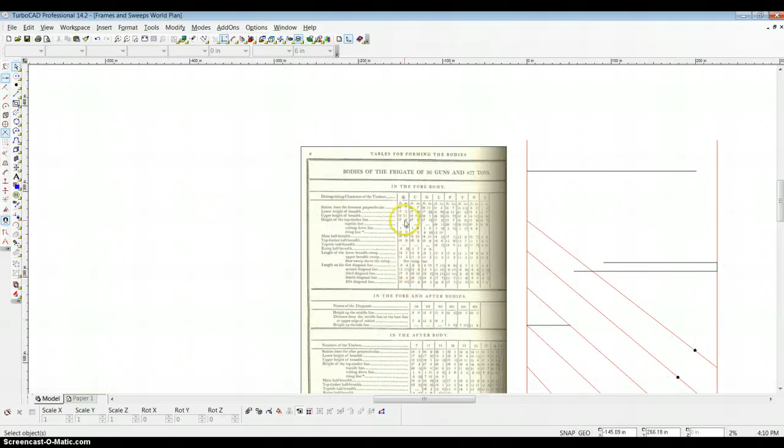The first thing I want to draw is the floor sweep, the arc at the bottom of the station line or frame. That will have its center at the end of the rising. This isn't the rising line, but it determines the point on the rising line we'll use, the end of this line here, that point there.

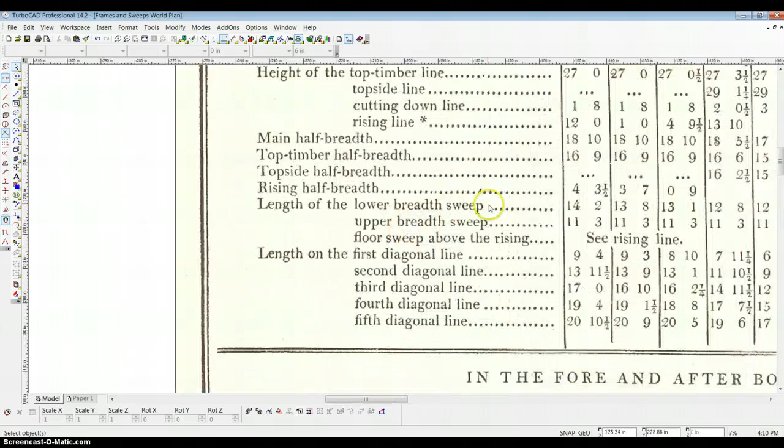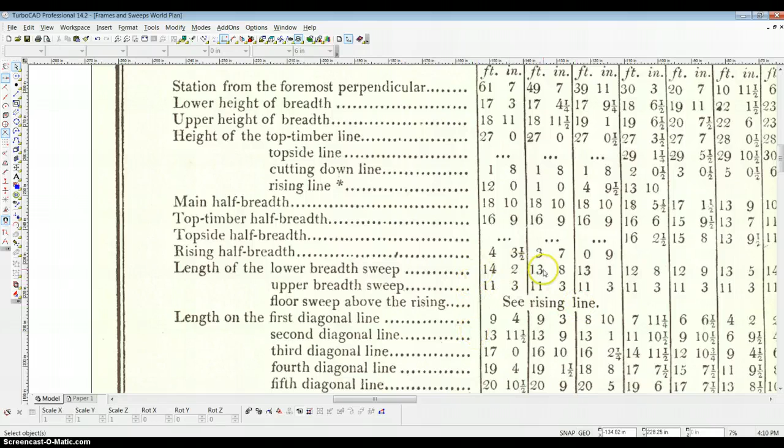Now the problem is, how long is the radius? We look it up in the chart, and it says the length of the floor sweep above the rising is, well, see the rising line. I have no idea how you do that. So I went into Steel, and reading in the text, evidently this is what you do: use the point on the diagonal closest to the head of the floor timber.

How do we find that? Well, we look up in Steel and find out the floor timber was 21 feet long, half of that is 10.5 feet. If you come out 10.5 feet from the middle line, you'd have a line right about here. So this point here is the closest point we have to the head of the floor timber.

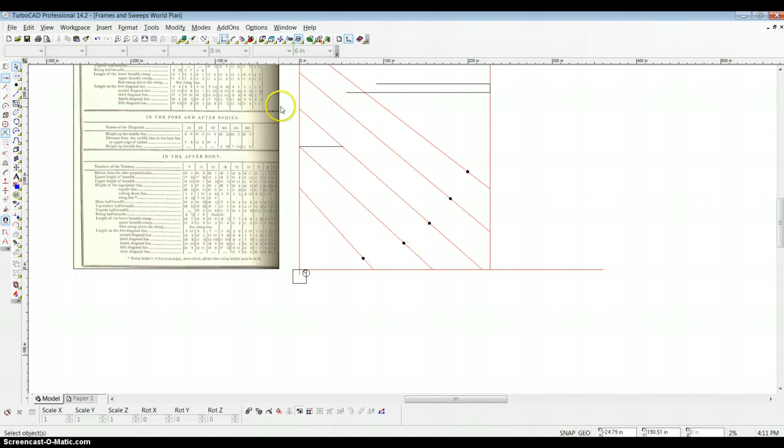Consequently, we're going to draw an arc. We'll put the center of it at the end of the line, then put the arc with a radius at that point. We'll just draw it out here and bring it up farther than we need, but we can trim it off later. So that's our floor sweep.

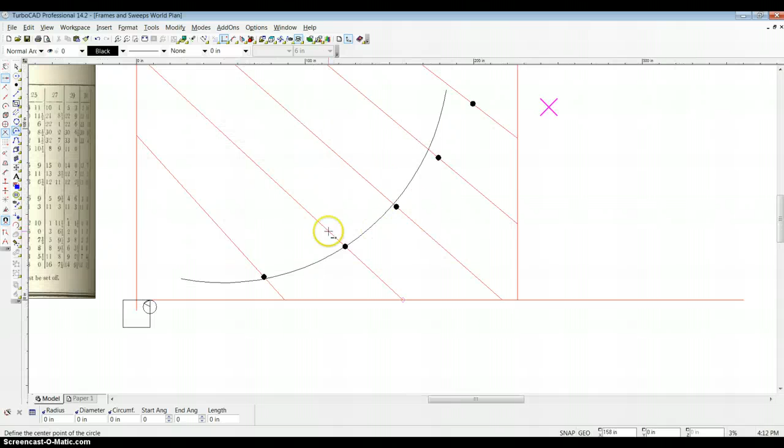Next we put in the lower breadth sweep. Much easier to do. We use this as our center, we use the other end of the line for the radius, and now we draw in that sweep. It stops at the lower breadth line, so we can stop it right there.

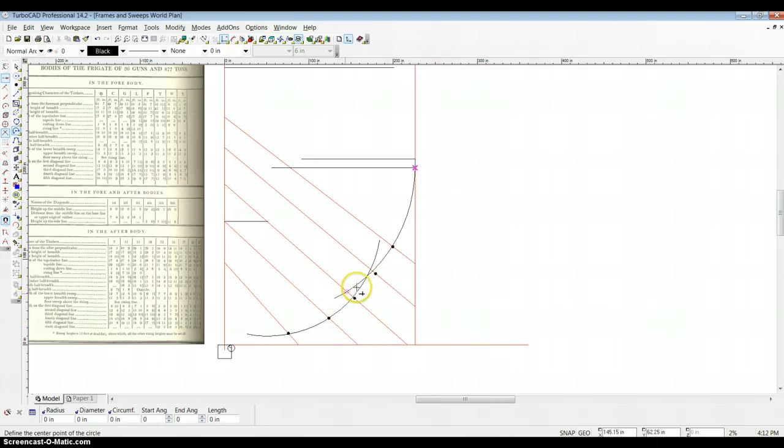Right. Now what we need is a sweep or arc that will join these two lines in a fair way that won't have a glitch on it, a bump or a break.

The literature says you draw a reconciling sweep. It reconciles these two arcs to one another. This reconciling sweep has to be tangent to these two arcs. The old literature says draw it to the back of the arc. Whenever you see that phrase, back of the arc or back of the circle, that just means tangent to the circle or tangent to the arc.

And then it has to go through these points on the diagonals. So we use a tool that allows us to draw arcs tangent to entities. I choose this as one of my entities, I choose this as the other.

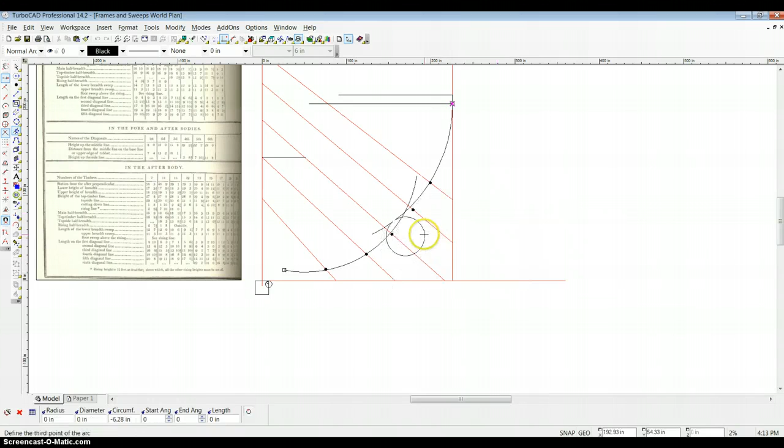Now what I'm going to do is use a point, and as I zoom in here, I'm going to use this point on the fourth diagonal, I think. Snap it there, and then the arc itself will sweep from here, and I'll bring it up well past the breadth line. So now I have three arcs.

I have the floor sweep, the lower breadth sweep, and the reconciling sweep.

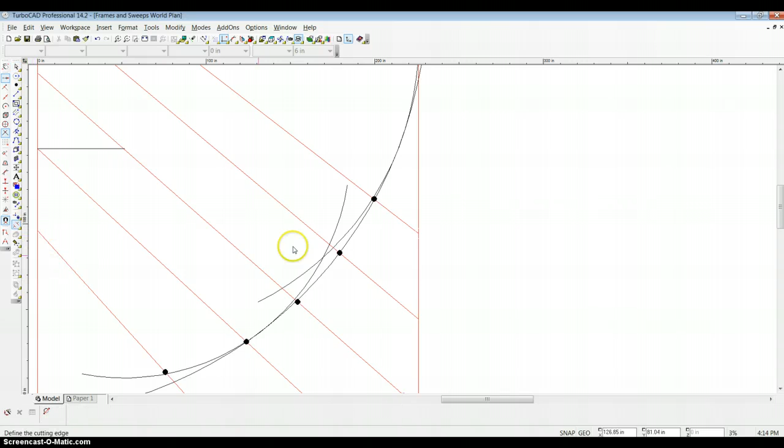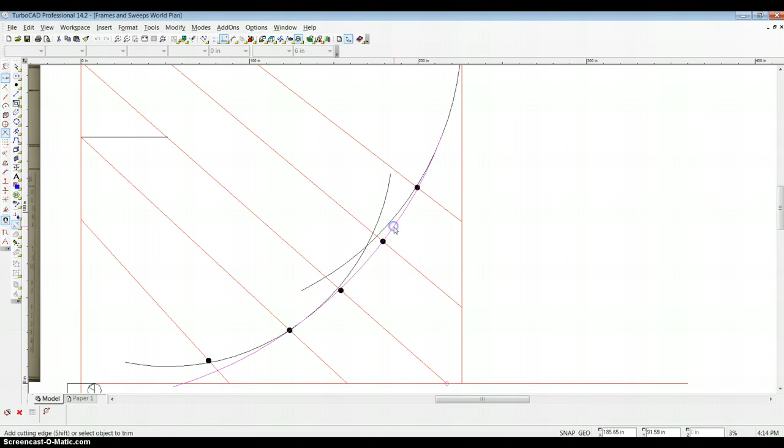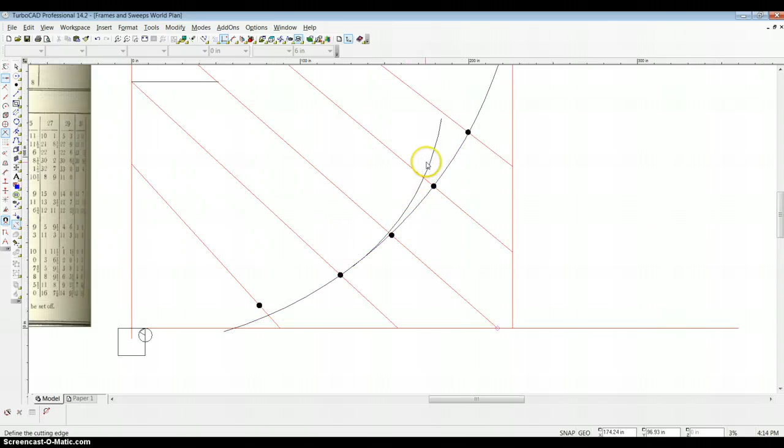Come over here and I use my trim tool to trim it all up. First I'm going to trim off this piece up here, that's why I made it longer, so it'd be easier to find. Next I'm going to trim off the lower breadth sweep. Now, well, I could have done that really, trim off the floor sweep, then trim off the reconciling sweep.

I think I did that wrong. We'll try the trimming again. I want to trim this off, oops, that back. No, that's the reconciling sweep, I'm going to get rid of that. There we go. So that's the basic underbody of the frame.

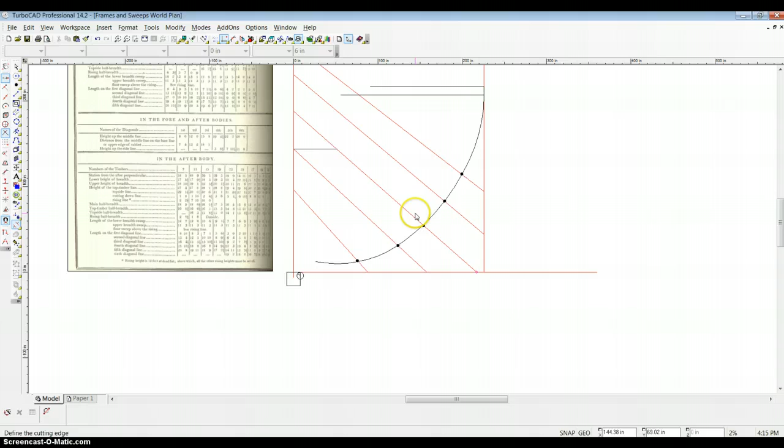Now we need to get it over here to the keel.

And again we use our arcs tangent. So we want an arc that is tangent to the floor sweep. Here's why we left this curve, it needs to be tangent to this. Tangent to there.

So we're just trying to get a curve. Obviously these are entirely different shapes depending on where I put this curve. It really shouldn't come, you just can't let the frame curl up. So I'm going to put it right about there. I believe in the loft this would have been done with a template of some kind.

There we go. And I'm going to draw from there to there. If I trim it up, okay.

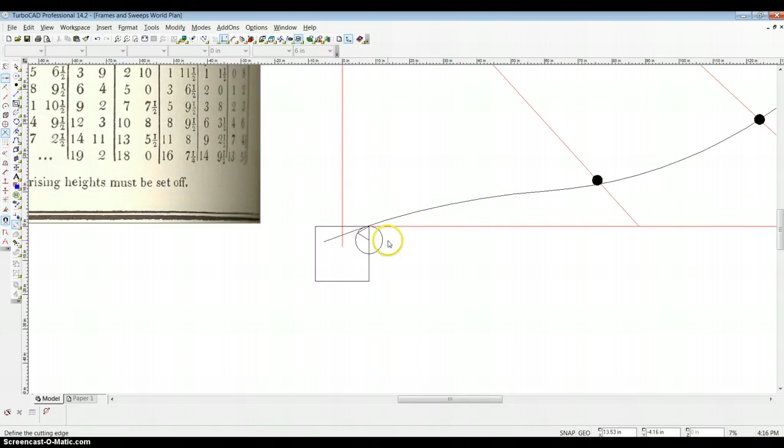Now you see that it comes into this arc. Doesn't come into the point here, doesn't come to the edge there. It comes into the arc. That's why the station lines and the frame lines keep coming inside the side of the keel as you look closely at your Maritime Museum plans.

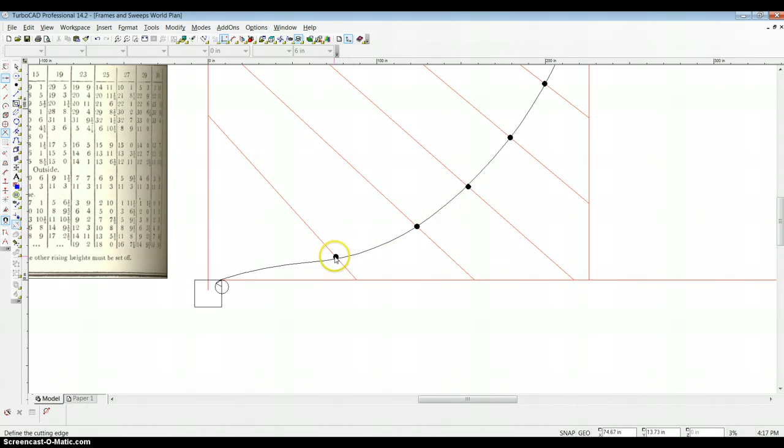That's a nice little arc, nice little station line. You notice we missed the diagonal point there, we missed it there, but three of them we actually used, or three of them we actually hit. I'd say that's pretty good for government work. We're not off by more than about an inch on those other points.

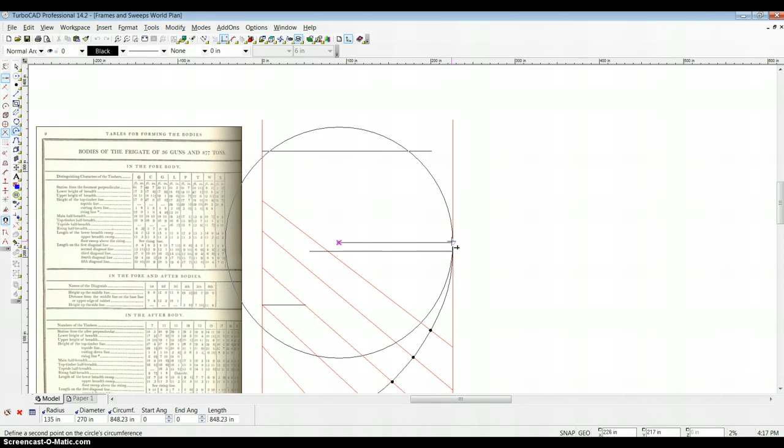We go now to the upper breadth sweep. Again we have it, we start at the upper breadth line, draw it up higher than we're going to need it. And now what we need is some kind of reconciling sweep coming down from the top timber point and fairing into the back of the upper breadth sweep that is tangent to the sweep.

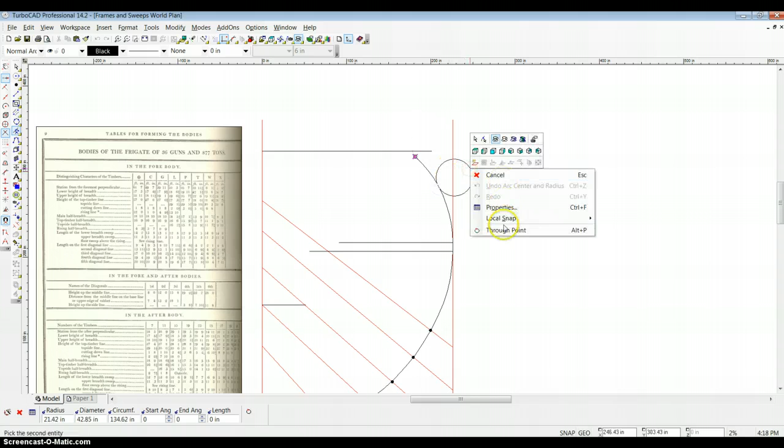So again I use my tangent arc tool. I choose this to be an arc, and tell it I want to hit there, and then I just draw it out until it looks nice to me.

I think that looks pretty good. So I'm just going to put it right there, and we'll draw it from that point down a little bit too far.

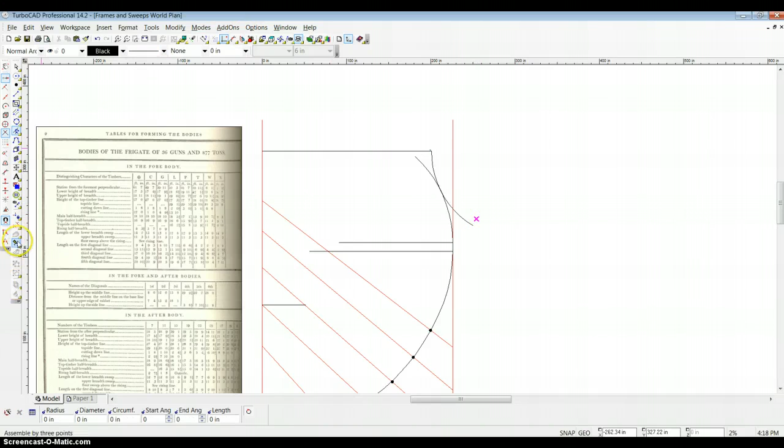Use our trimming tool in order to make everything look good. And that, ladies and gentlemen, is the dead flat frame.